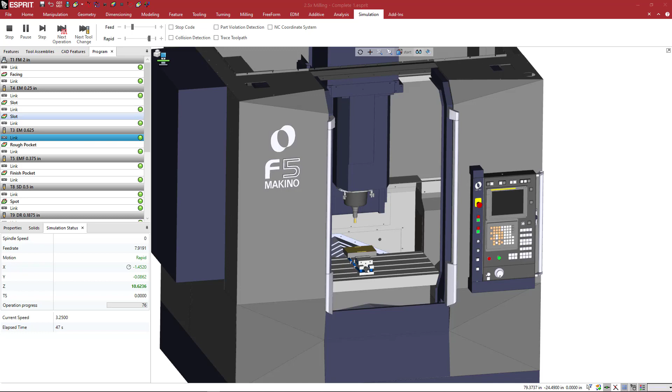As a machinist, you don't want to be milling into your expensive fixturing or accidentally rub your tool holder surfaces up against your work holding. So by spending a little time up front building your work holding products into the ESPRIT simulation, you will have a ton more confidence in your program sent to the floor.

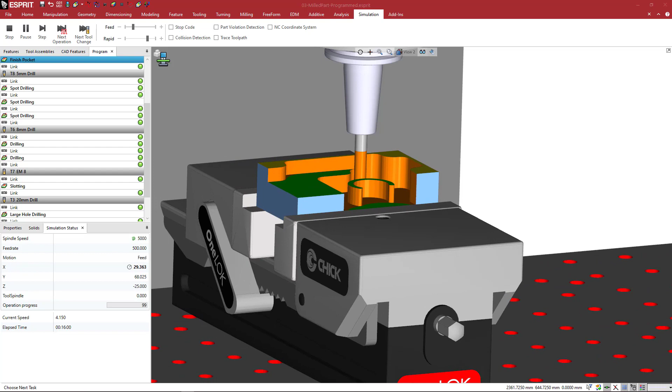So let's build this single jaw Chick vise. This is the CAD model for one of the Chick vises that you can download directly from their website. This particular model, if you wanted to follow along, is their OneLOK vise. It's the 1540 series, and there's two of them. There's a CM and an MCM. So this one is the MCM model.

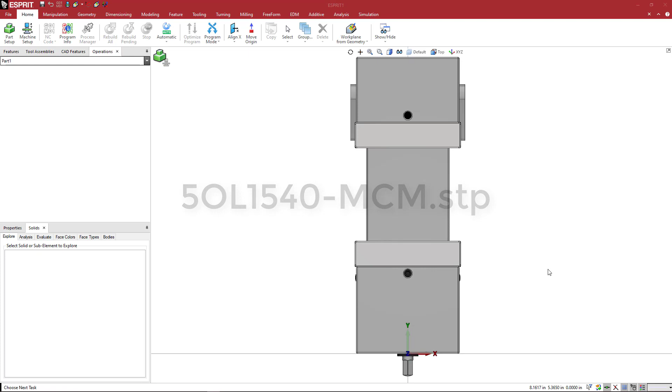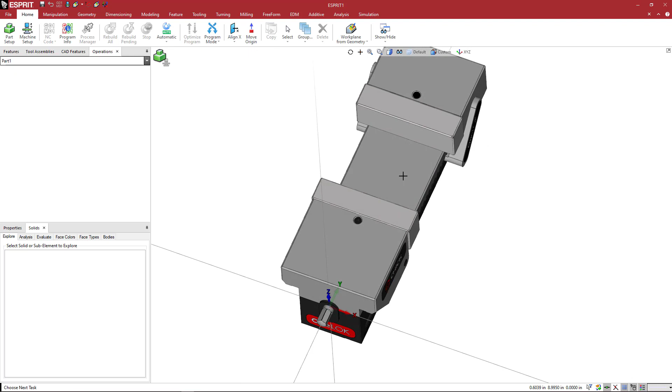I'm not really sure what the difference is between the two, but when we look at the model, the first thing that we want to do is make sure that the model is oriented and positioned correctly in space. So when we look at it, the movable, or the jaw axis, the vise axis, whatever you want to call that, is along Y. And I think that that's what we want, because typically most people would initially mount their vise in this way, in this orientation, with the Y-axis.

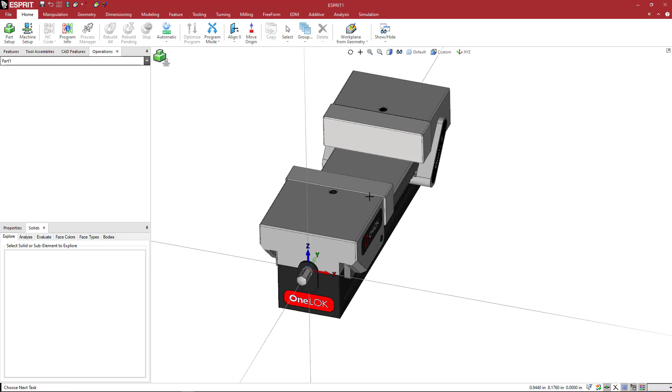Let's say you're standing in front of a Haas machine. Your vise is going to go in and out of the machine, this axis. So I think that that's fine. If we look at the orientation, it is normal to Z, which is correct, but the location of that needs to be adjusted. So on these particular products, I'll highlight this face here.

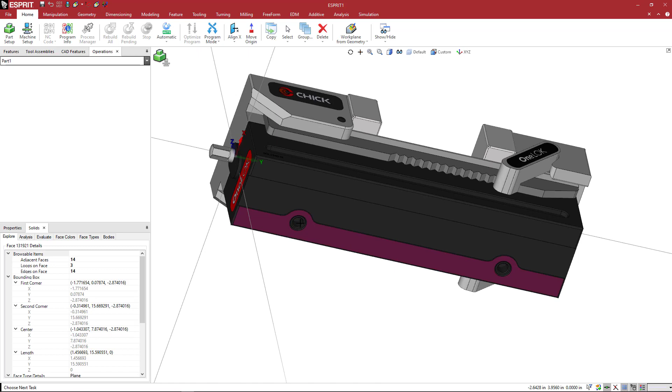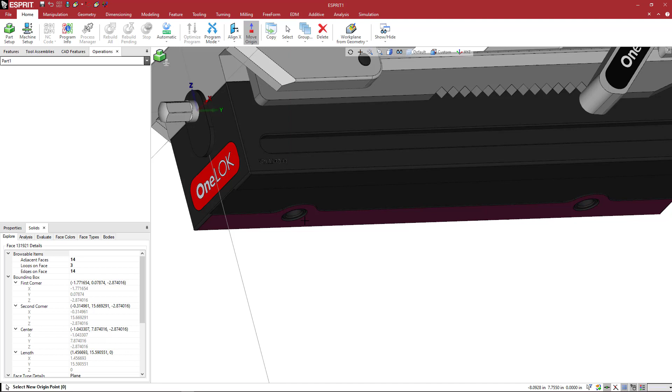What we're going to do is set the 0 point at one of these ground locations. So if you have a Chick foundation that has the press fit bushings for location finding and repeatability, we're just basically going to move the origin point to this location. So under the Home tab, we're going to come to Move Origin, and make sure that you can see that there's different little circles that I can highlight and pick. I want to make sure that I'm on this one.

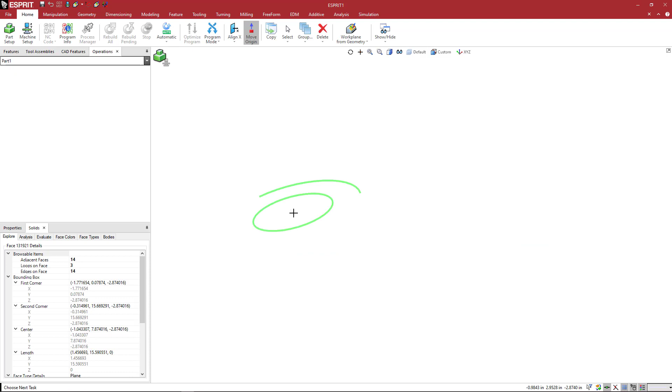This one is highlighting in green that outside face. I don't want to pick one of these inner bores or inner circular faces. I just want to pick this one on the outside, because that is the face that is going to sit flush. Let me go to a clear view here. These are the faces that are going to sit flush on the top of the table, or the CHICK foundation that you can interface this product with. So I'm going to go ahead and use that.

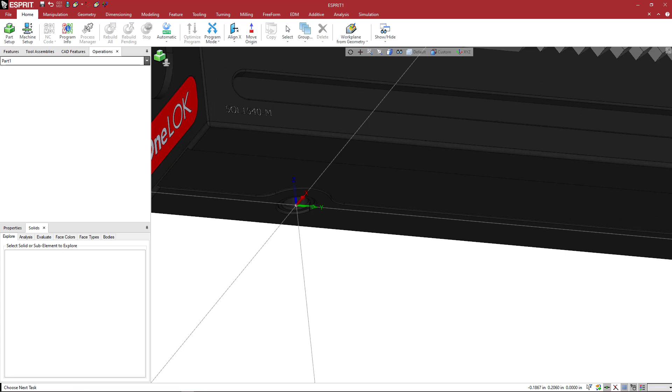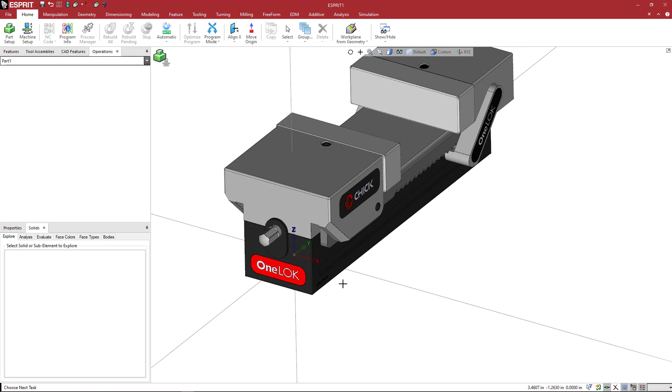Now, if you don't have a foundation, you don't plan to use a foundation, you got some custom thing, you can use a different location. You could set this to whatever you want. So basically, when we load this fixture into the ESPRIT simulation, this is going to be the reference location point that ESPRIT is going to use. So if you loaded it right on your machine table without the foundation, this point would be at basically the center of the machine table itself.

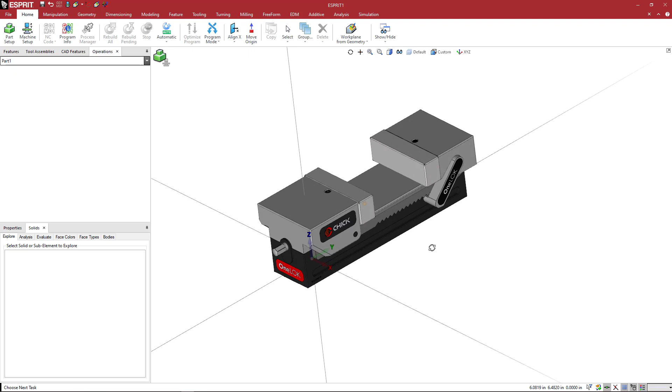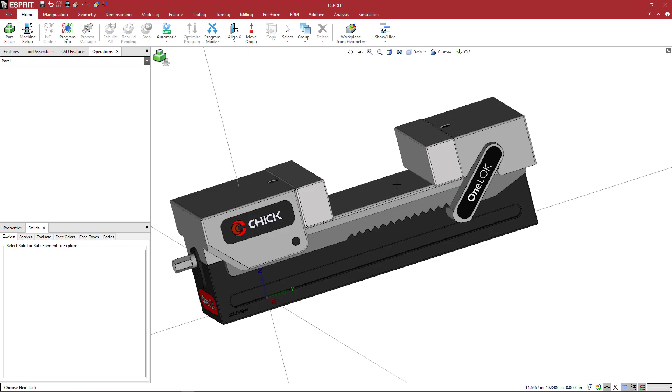So the orientation, the location, the rotation along Y here looks good. So we're going to start setting some of our 0 positions. When you make a vise like this in the ESPRIT interface, there's another product called Machine Tool Builder that gives you more flexibility. But inside the ESPRIT interface for basic fixturing like this with a single jaw, you really want to start with the jaw in the open position, because when you save everything out, ESPRIT thinks everything is in the open position, and it's going to move to close it. So we want this in the open, or the maximum position.

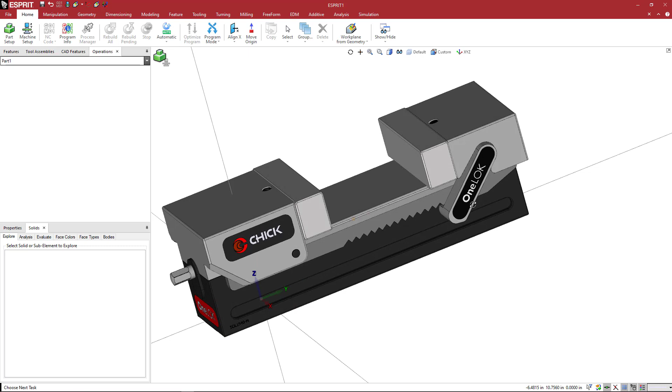On this product, it's like 128 millimeters. You can see these serrations where the OneLOK lever is located. And to me, this looks like it's at the maximum open position, so I'm going to assume that's what it is. So we're going to go ahead and leave everything alone.

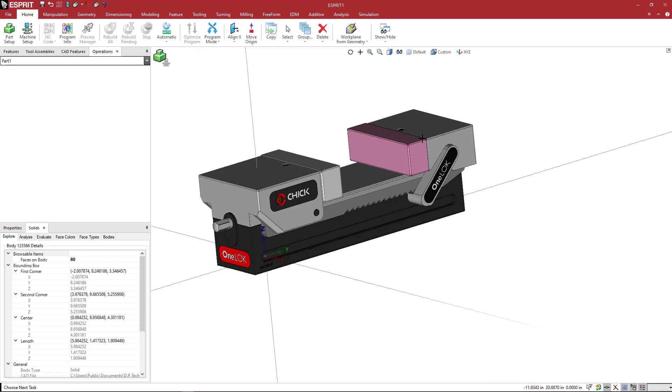If you wanted to give yourself a little bit of leeway, what we can do is, let's see here. So this is a separate solid. This here is a separate solid. Let me put this on a separate layer here. We're going to call this movable.

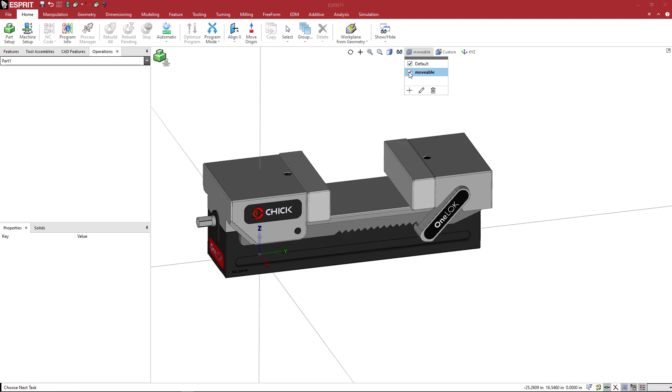And I'm going to come over here to the properties, come to general, and here's where you can change your layer. I'm going to say from default, let's put that on moveable. And if I turn this layer off temporarily, I can see that's basically everything that would go along for the ride.

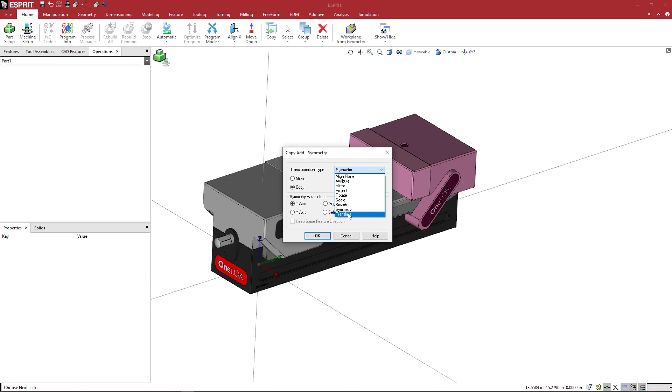So if you want to move these two solids just a little bit more, just so you know in the simulation, if you've got a big part in there, as long as this is able to clamp, you can go ahead here and say copy, and then you can do a translate command, and you can say move, and we're going along the y-axis here, so we want to go in a positive direction. So I'm just going to say, let me give myself an extra quarter or a half an inch. So I'm just going to say 0.5.

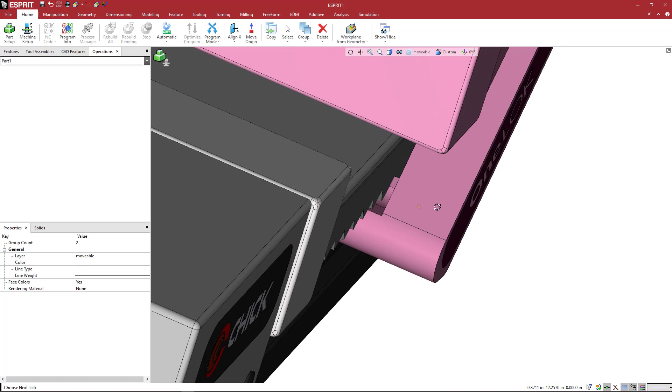And do you need to do this? No, it's not that big of a deal. But we can see here now that we are beyond the serration. So it's just a little bit of a fudge factor for myself. You don't need to do this. So we've moved this to a different layer.

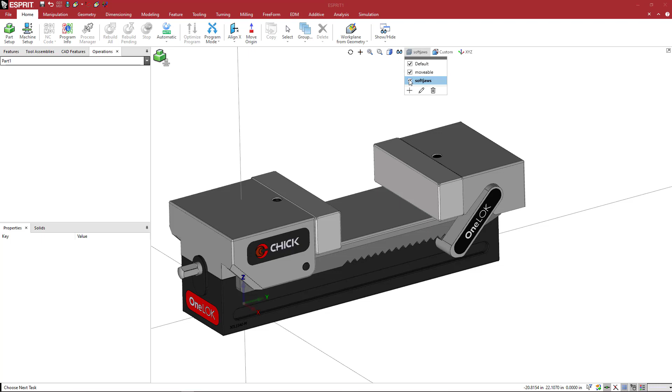Now what I want to do is take each of these, basically these soft jaws, and put them on their own layer. So I'm going to come here to the layers and create another layer, and I'll call this soft jaws, and we'll put them on that layer temporarily as well. So I'm going to turn those off, and I'm going to come back here and activate the default layer.

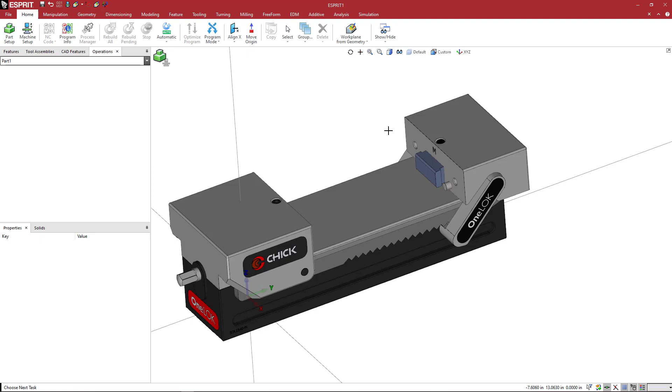So now I have basically the fixturing cavity or zone of this vise without the jaws in there, because I might want to define different jaws for different applications. Maybe I have a round part or something with a different shape on it, and I might want to create that depending on how accurate I want my simulation to be.

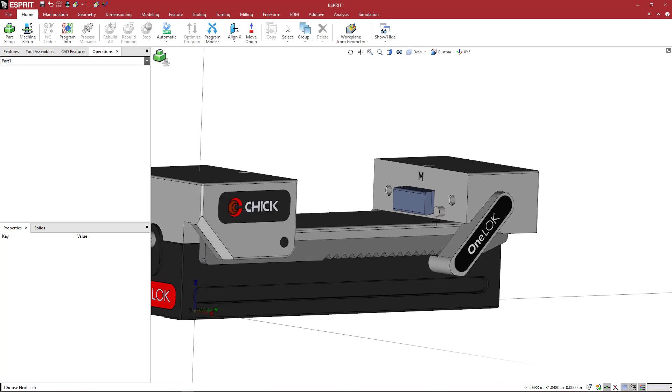So looking at this, we want to define our jaw axis. So this stuff here is going to move. It's going to slide up and down the y-axis, and we need to have a reference position for that. So I think I'm just going to come to this bottom position, and okay, so in ESPRIT, the default movable axis is always going to be along X. So we see here that our UVW is right now moving it along Y.

So anything that is going to be on the jaw axis, I want to make sure that it's moving along X. So we don't need to position our entire vise. We just need to position the jaw axis that we're defining. So around the Z axis, we're going to rotate our UVW by 90 degrees. So here we're going to come and say rotate UVW.

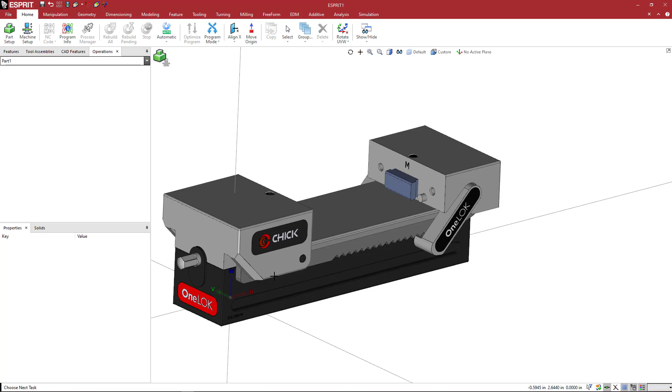And down here at the bottom left, it asks the rotation about U, then V, then W. So we're going to put in 0, enter, 0, enter, and then positive 90. And that's going to get our U axis orientation so that the jaw will move along U. And now I want to position that. So I'm going to position it where my jaw axis is going to be.

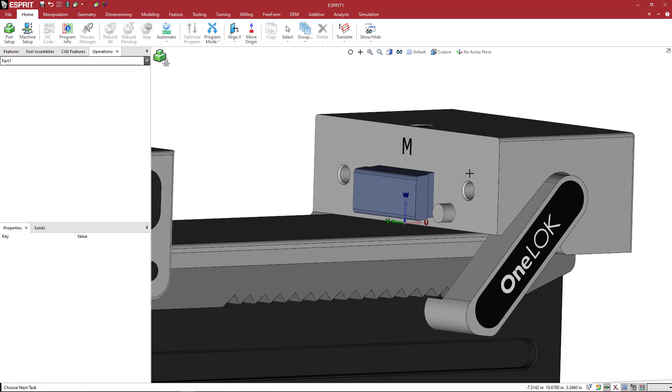So I'm going to come here and say, let's translate. So activate translate, then click on the icon, and we're going to translate our UVW, and you'll see that there's a center point on this bottom edge of the solid, and if I click there, it's going to relocate my UVW at this position.

And here I'm going to come and say, let's make a jaw adapter _1. There's only one movable jaw. I don't need to worry about naming this or anything. So we're just going to go ahead and create that. So we have that now.

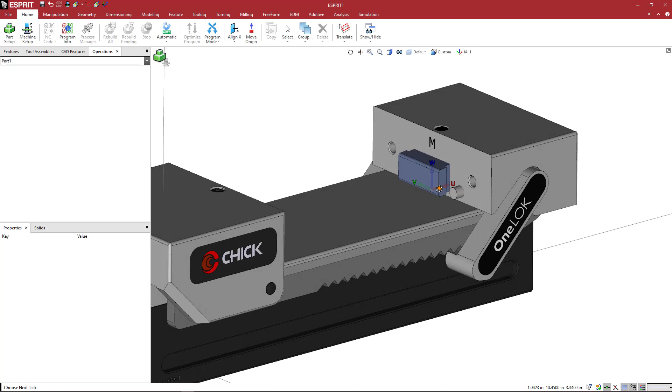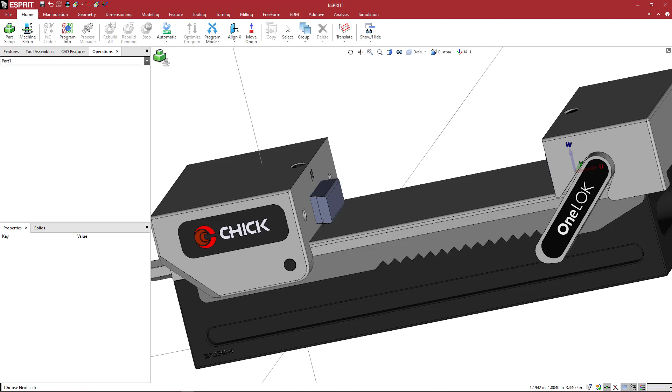Now what I want to do is put a location reference on this side. So I'm going to basically create a location where I can now mount a fixed jaw. So we can have a different jaw. And to explain this, on this movable, all of this with the jaw is going to be a single element. And this will make a little bit more sense later.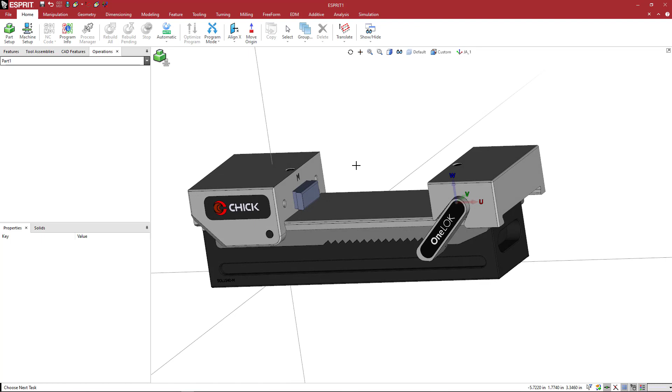But we're going to make one element that's going to include this whole moving assembly, which is going to be whatever soft jaw that I have here, or serrated or stepped or whatever jaw, with this lever component here. That's all going to be one. And then this body is going to be another one. And then this jaw here is going to be a third component. And they're all going to be assembled inside of the simulation.

So I need to make a location here for this jaw. And what I can do is I could leave this orientation alone the way that it is.

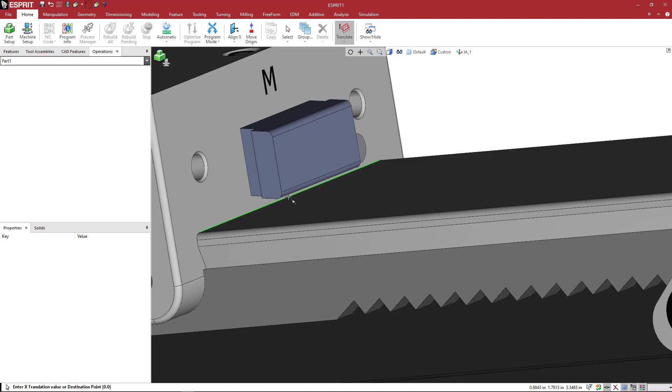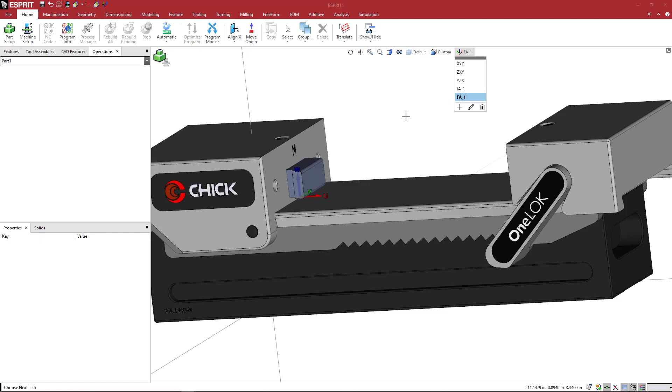I'll just come over here to translate and pick right here. And now I have this location for what we'll call a fixture adapter. So we had a jaw adapter for the moving portion, but this one is going to be a fixed jaw, and it's going to be a fixture adapter FA_1. Okay? So we have these two locations located and defined.

And now what we want to do is, actually, let's show you this. Let's rename this. Let's right click here and rename this plane. And at the end of this name, FA_1, we'll do an underscore fixed jaw. So now I see what it looks like. And I'm going to create another one, and we're just going to call this FA_2. So let's say we're loading another fixture into this fixture. So I have that here that I can locate that to.

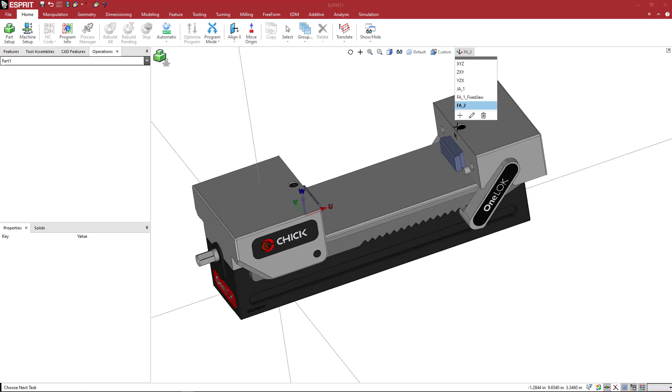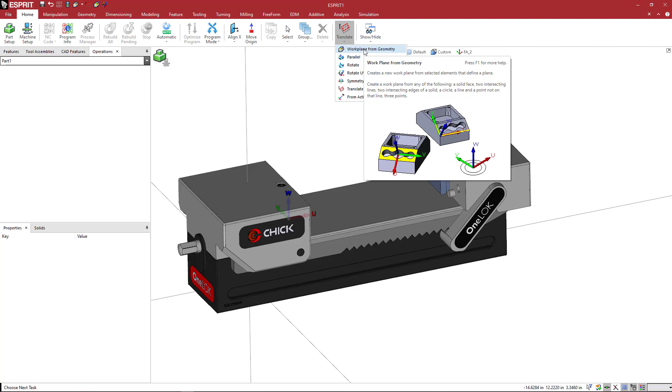And if you're wondering, why did you just put it right there? Well, because you can move that fixture around afterward, so you don't need to worry about where it's necessarily located. So now I want to create a place where my workpiece would appear on the screen when I want to mount it into the machine. So I'm going to come here to work plane from geometry. You have this little arrow at the bottom. Pick your work plane from geometry, activate the icon, and we're going to pick maybe,

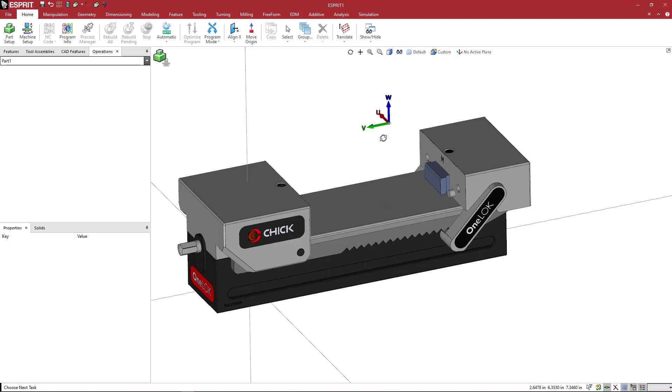we'll go from the base here, and we'll just shift this. So we'll come up and say translate this. I'm going to move this up 0, 0, and then let's say 4 inches, so it's up here above the fixture. And then I'm going to come here and add a WA_1. WA means workpiece adapter _1. So we have a workpiece adapter. So now what I want to do is save out my base unit.

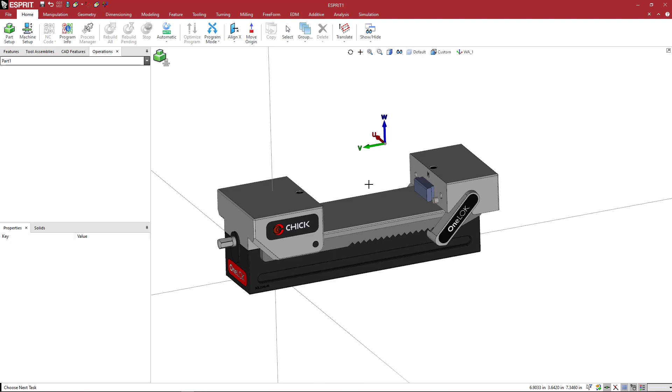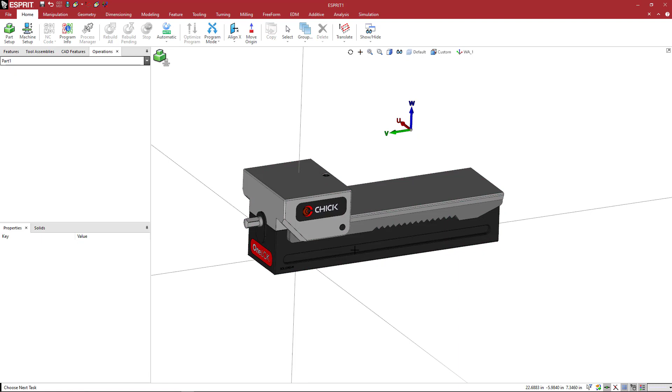Okay, so I'm going to turn off the movable jaw. So I'm just looking at my base unit here, and then I'm going to click and drag like this to grab this whole base unit here. And the nice thing about the Chick website and their engineers, they put all this coloring already in there, so we don't have to do any of that. If you've been watching any of the other tutorial videos, it's really nice that those guys made their product look just like it would in real life. So we don't need to do anything there. I'm going to highlight everything.

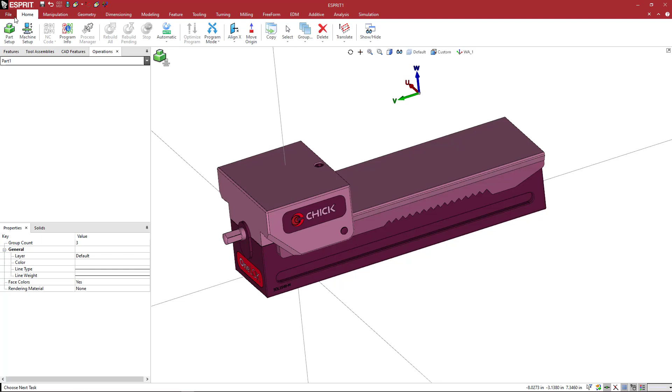I'm going to come to File, Save As, and then save this as a fixture file, GDML. I have a fixtures Chick folder, and then OneLOK Vice, and here I'm just going to leave it the name that the CAD model came in. I'm going to say save. And another thing I'm going to do is File, Save As, and save this as an ESPRIT file as well.

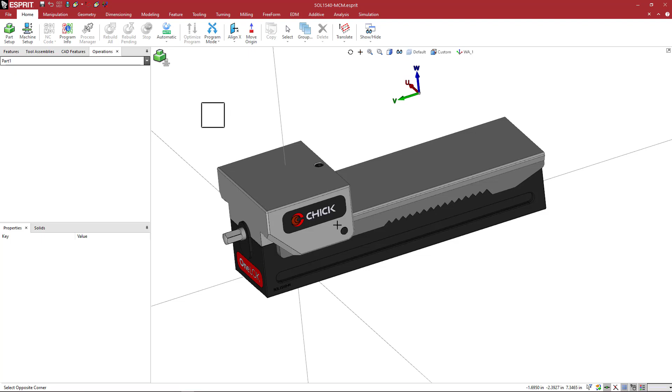And the reason I'm doing that is I might mess up or I might want to change something. So instead of doing all these steps again, I'm just going to save that ESPRIT file. Because once you save the GDML, if you don't save the ESPRIT, you'll have to start from scratch. So now I've saved this, and I've captured all of the work that I've done. I'm going to basically grab all this and hit the delete key, okay? And now I'm going to come back here and turn these on.

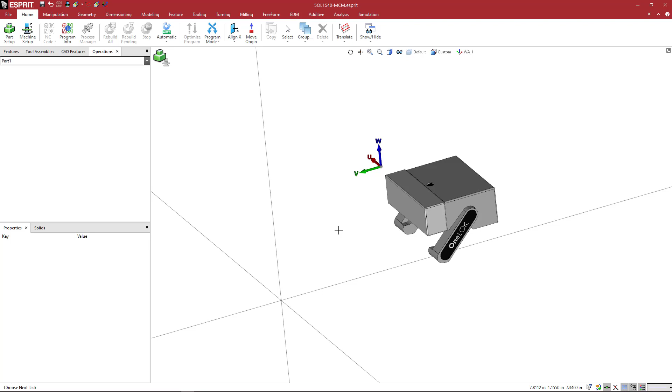Now I'm going to concern myself with the movable jaw assembly. So we've done our first component, which is the base unit. Now we're going to do the movable jaw components next. So this one I don't need. I'm just going to click on it, delete it. Remember, we saved the file, so I don't need to worry about that. I'll just reload the file and keep that one and delete these on the next one.

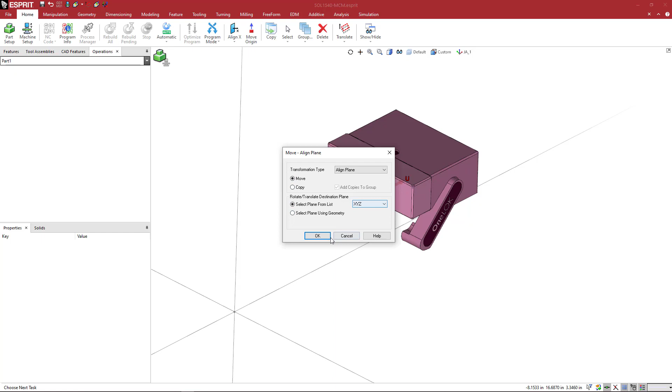So now I want to come back to the jaw adapter. I'll double click on that in the list and it shows me where this is. So I have this assembly here, and I want to highlight it all, right click, come to copy, and say align plane, move, and we're just going to align it to XYZ. And when I do that, it snaps it into the position where the 0 point is at the jaw axis. So now here I can basically delete all these.

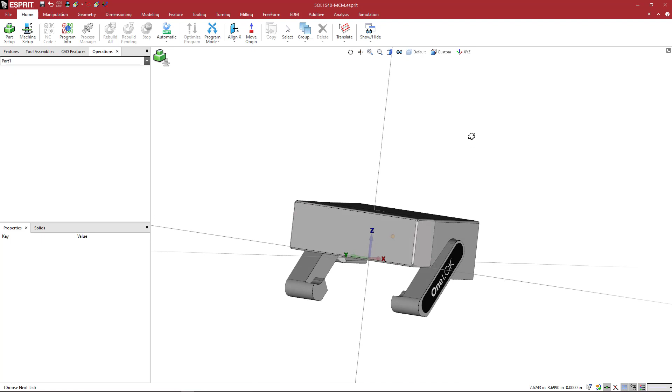I'm just going to delete this, delete this, delete this, delete that. I don't need any of those anymore. So basically I'm back to my standard work planes. I've got my movable jaw, and we can save this out.

So let's say eventually in the future I'm going to make some different soft jaws. I'm going to save this as my base jaw file. So I'm going to come here and say File, Save As, and this is going to be an ESPRIT file. And I'm just going to come here toward the end of the name and add underscore movable jaw.

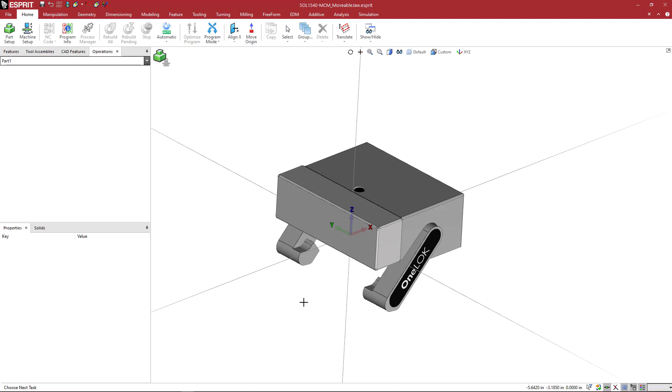So whenever I want to make a different movable jaw for this base unit, this 1540 MCM Chick Vise, I could just open this file and here I go, and now I can do something. So let's do something really quick while we're here. You could do whatever you want. I'm going to do this kind of quick. So if you want to follow along, you could pause and catch up.

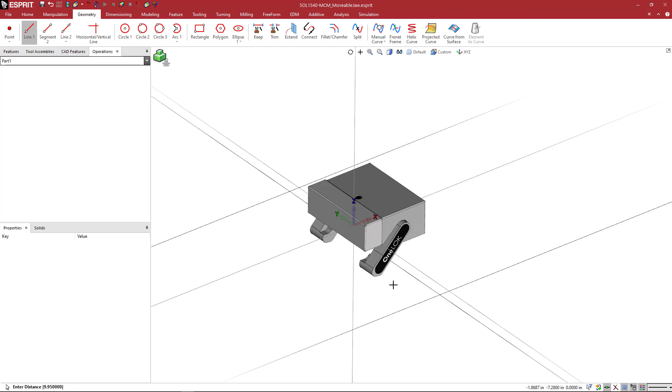I'm just going to say, let's offset this by 0.75, and then I'm going to offset my center axis by, it doesn't really matter as long as it's big enough to encompass the entire jaw. I'm going to come to keep. I'm going to keep these pieces of geometry, and then I'm going to shift and grab and translate this guy up, and we'll move this up 1.5.

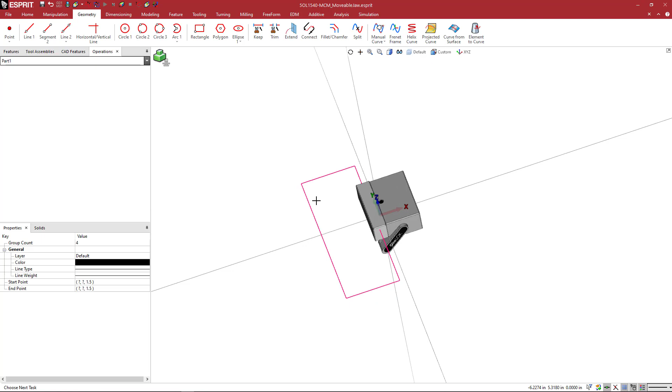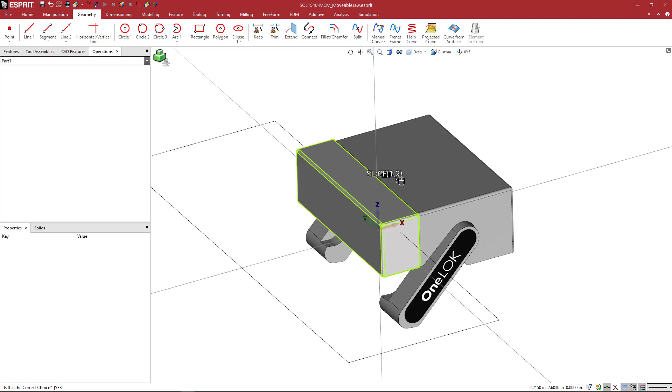I think the jaw itself is like 1.9 inches or something. So this gives me almost a 1/2 inch of height, and the width of the jaw, I don't remember offhand. Anyway, I'm going to basically cut extrude this away. So I'm looking at this jaw. This is jaw or solid number 2, 1, comma 2. That's this jaw. That's the one that I want to manipulate.

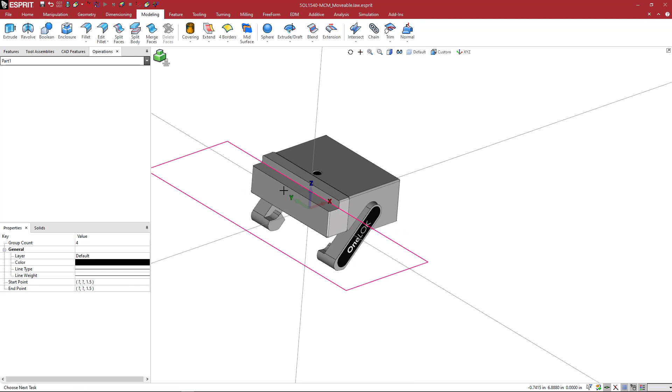So I'm going to come to modeling. I'm going to highlight my rectangle that I made, and I'm going to say extrude, okay? And I'm going to activate body number 2, and say let's cut that, and say okay. So basically I have a soft jaw that I've put a step in. So now I can set the bottom of my workpiece to this face, and the jaw will automatically be closed to this face. So now I just want to make sure nothing is highlighted.

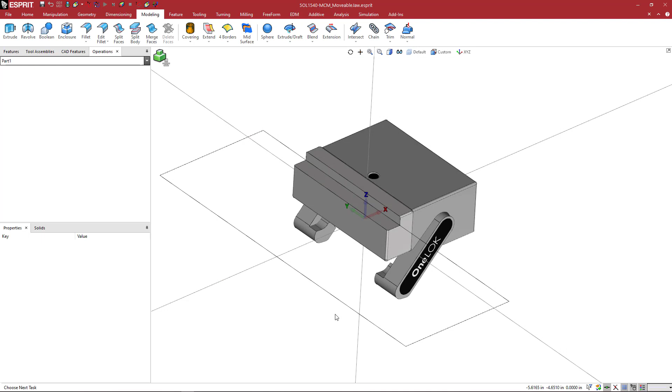So I'm grabbing everything and come to File, Save As, and I'm going to save a jaw file. This is a jaw file. Okay, so this is going to be the movable jaw, and I'm going to say underscore 1.5 by 0.75, and say okay. So we've saved that, and we've saved our original soft jaw file. So now I'm done with this one.

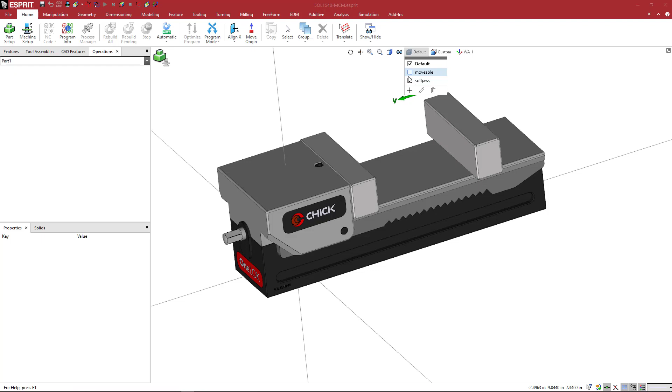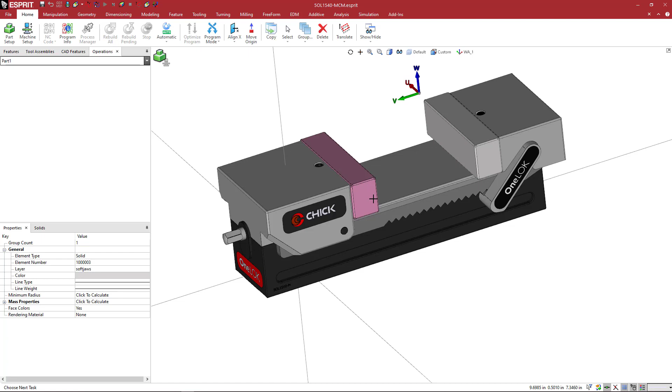And now I want to come back and open my base file that I saved out earlier, which has all of the components in it. So we're going to reload this file, and I guess the easiest way is to highlight the one that I want and hit Control W. That's a quick little hotkey to swap the group. So if you want to keep one thing and you've got 100 things on the screen, just pick that one item or 3 items, hit Control W, and then right click or hit the delete key, and you're done.

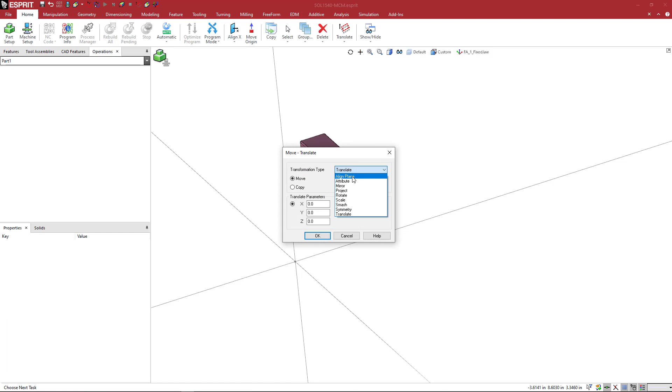So here we have a fixed jaw work plane. So again, what are we going to do? We're going to highlight this. We're going to right click, copy. We're going to go to Align Plane, Move, select Axis XYZ, say boom, done. Now these, I don't need them anymore. These are gone. So we delete those. And now what?

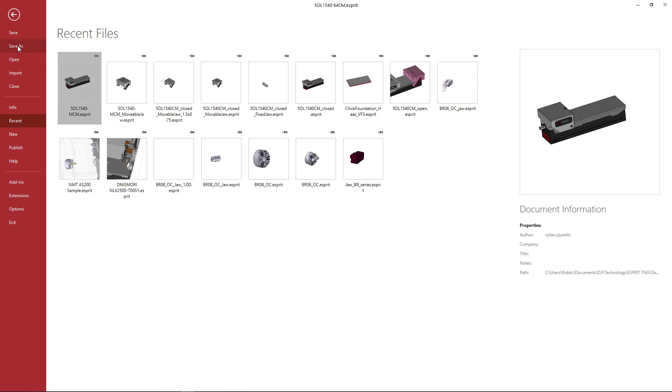I'm going to save out my fixed jaw. So I'm going to say File, Save As, and here at the end of the file, I'm going to do underscore fixed jaw. So now I have my base file for any fixed jaw file that I want to create. So now I'm just going to duplicate what I did there. And again, if you want to follow along or do your own thing, whatever.

I'm going to come over here to 0.75, doing the same thing, offset a couple of lines, fairly large, offset this one, come over to keep.

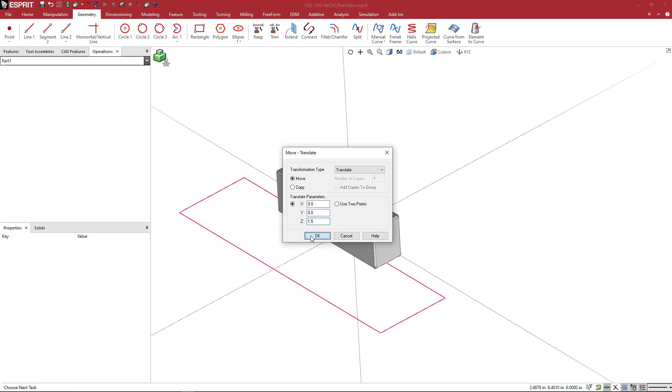We're going to grab these 4 elements, keep that, Shift, Control C, translate. We're going to move that up 1.5. And then we only have one solid. I already know which one it's going to be. I come to Modeling, Extrude. We're going to come over here to select that one. It's already set to cut. And boom, we're done. I'm going to click away so nothing is highlighted.

And I'm going to say File, Save As. This one, we're not doing a jaw, we're doing a fixture file. A fixture file, okay? So here I'm going to put that same underscore 1.5 by 0.75. Say OK. And now we can see how this is going to look in the machine.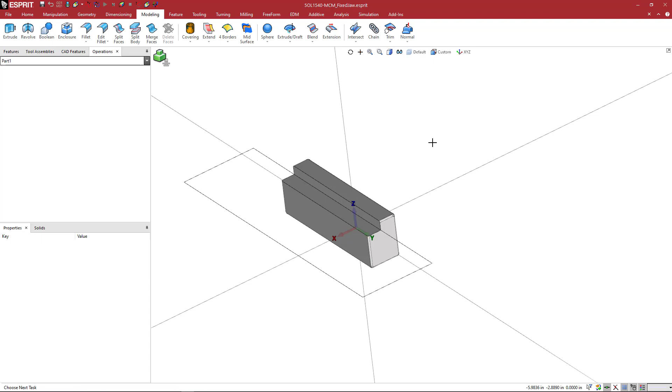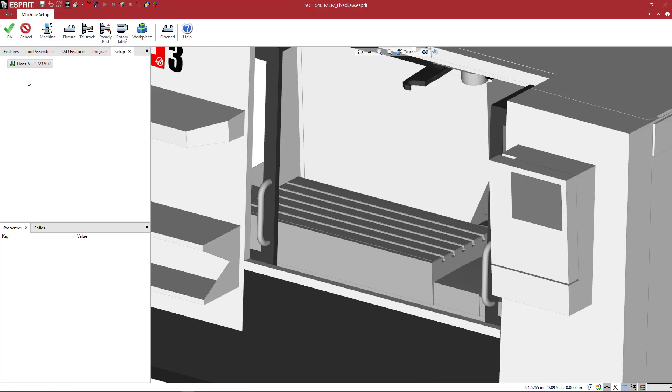So we'll come here to the machine setup, and I'm going to come to Haas. So we'll load a Haas machine. And earlier, I created a foundation. So what I'm going to do first is create that foundation. So when you have your machine loaded, you're going to come here to Fixture, and I'm going to come to Chick, Foundation. And I had to build this from their DXF print or their PDF print. So I just whipped this together really quick. And I'm going to say OK.

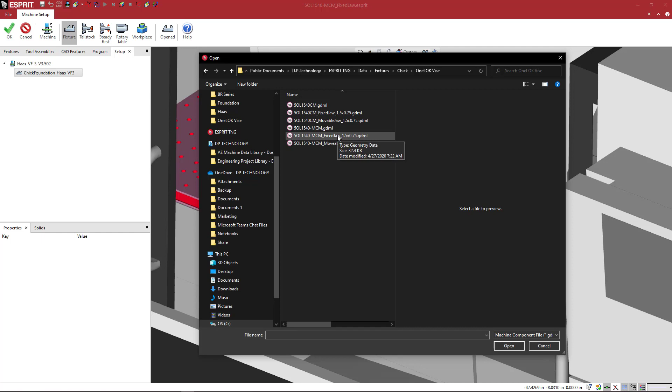And then on here, we're going to mount a fixture. So here I'm going to go to my OneLOK vise. The one that we just made was the MCM. So we're going to load this one. And you'll see that on the fixture, it comes over here to the left. So on my fixture, I created 3 FA locations.

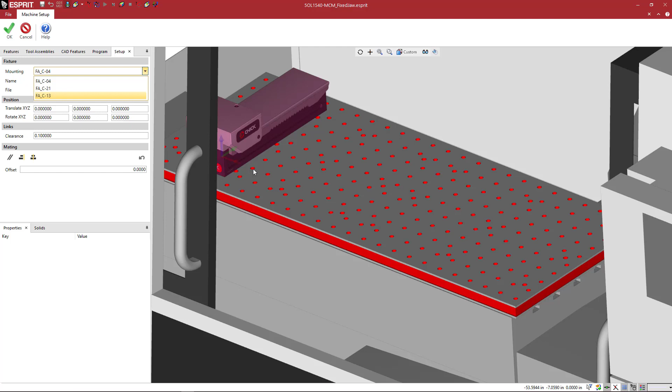So on these Chick foundations, they have a numeric or alphanumeric system where you have these rows that are A, B, C, D, and then each of these columns along Y of location pins or points, you have a numbering system. So it starts with this column first is 1, and as you move across, this middle one is 13. So if I just pick, I did 4, so you can see, I'll go to kind of a clear view here.

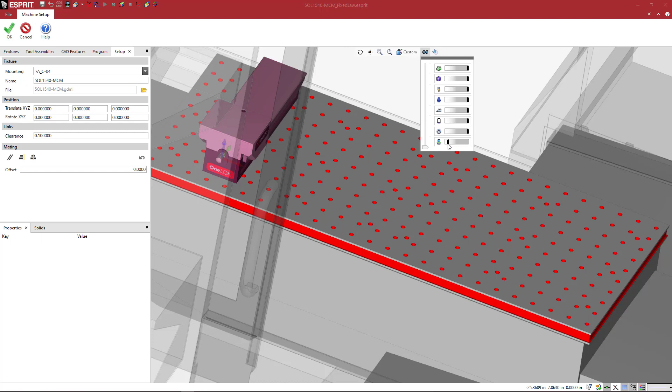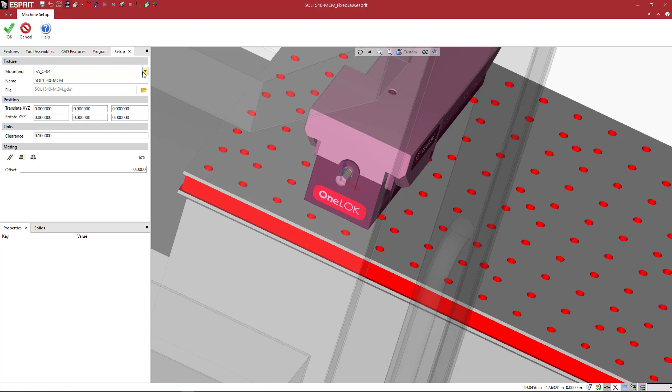You can see that on 4, 1, 2, 3, 4, where the O on the OneLOK is, I snapped that point in the very beginning where that location pin would be. It snaps right to, and we're set to C4. So A is this first row closest to the operator, second row, third row for C, A, B, C, and then 1, 2, 3, 4, boom, it's right there. So if I come here to C13, it puts that at basically that middle.

And if I wanted to move this around, each of these holes is 50 millimeters apart. So if I want to move it to the left, I could put in minus 50 divided by 25.4 because I'm in an inch file. Sorry, I got to put in an equal here. So when you put in an equal, it will shift that over and do the math for you of 1.96. So anyway, we've got that in there. I'm going to say OK.

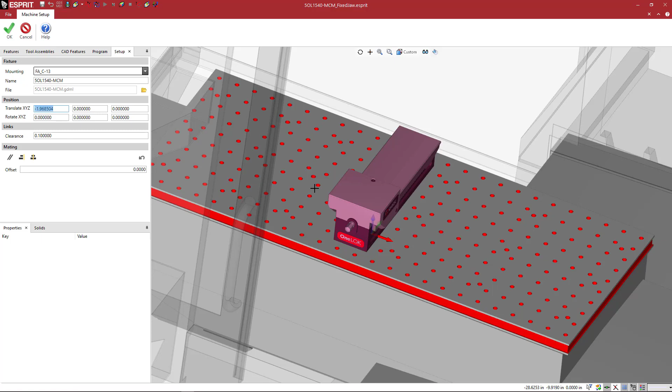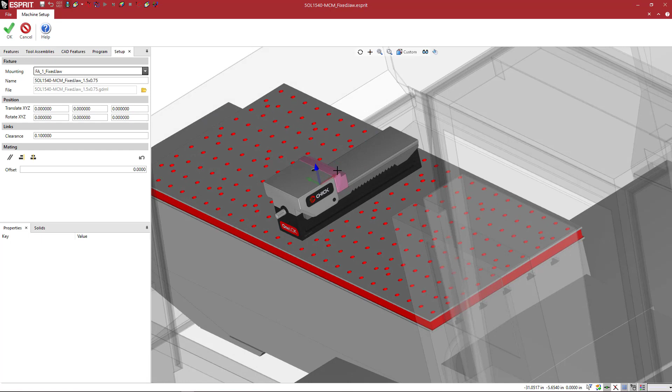And now let's go ahead and load a fixture. We're going to load a fixture, and we're going to bring in our fixed jaw. And this is our fixed jaw. I'm going to open that guy up, and you see that he comes in on the same location, but it's on the fixed jaw location, and there it is, boom, looking good. I'm going to say OK.

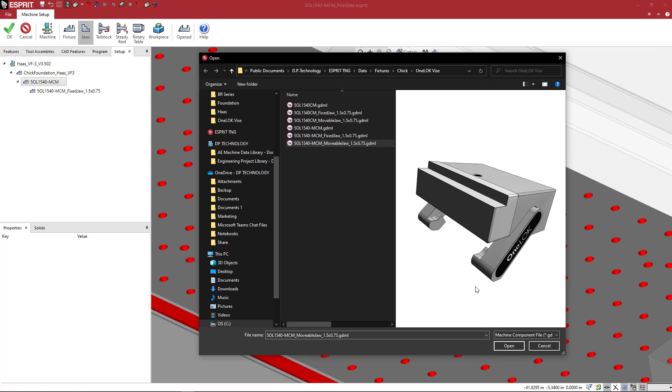And now, there's no jaw icon here. Why is that? It's because I'm still highlighted on my fixed jaw. I want to go back to the base unit. And now you see we have an active jaw icon. We're going to pick this icon here. And now I'm going to pick my movable jaw. So we want to make sure that we pick the MCM movable jaw. Okay? And now you see that this is my jaw assembly. I'm going to bring that in, and there it is. So when we see this opened and closed, if we had a workpiece in there, it would stop.

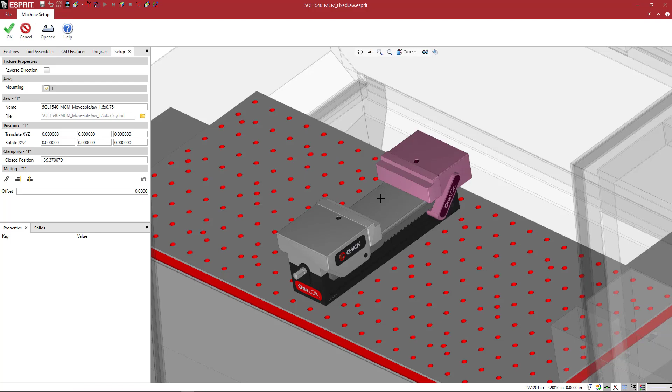But basically, we are ready to set up some awesome looking, very accurate ESPRIT simulations to make sure our program checking, collision checking, everything is there so that when this NC code is sent to the shop floor, we're very confident in our program, especially if you've watched some of the other milling holder tutorials. You're going to have some really nice accurate simulation. So upstream of the machine, everything can be as accurate as possible. There's no surprises, and you're not editing code at the machine.